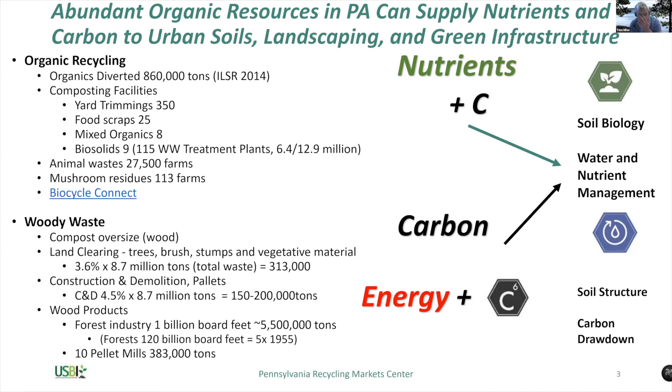So the total combination of organic recycling and wood waste together can be used to provide improved soil biology, water and nutrient management, soil structure, and carbon drawdown. Also, the woody waste can be converted to both energy and carbon in the form of biochar.

Composting generally involves a significant amount of nitrogen. If biochar is added to composting, it will capture that nitrogen and make it available to the plants. The same is true of phosphorus.

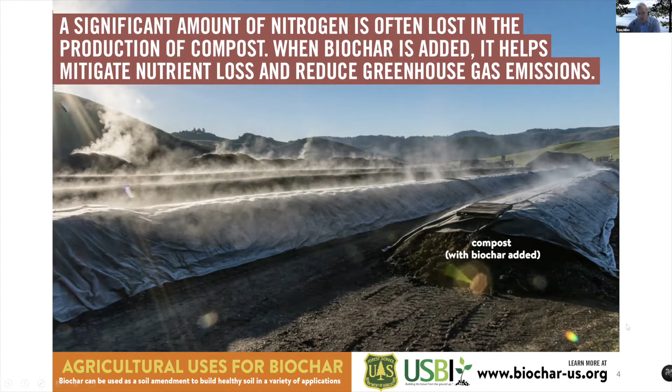So in Pennsylvania, for example, as in many other states, there are some good resources already for biochar. One of the earliest companies was Soil Reef, a company called Rhizochar, which is an inoculated char, and Organic Mechanics. Mark will speak today. Green Light Plants, Dale Henderson has a lot of experience with biochar, as does Gary Gilmore, who's just recently retired from the Forest Service, and Chuck Hegberg, who will also speak today.

On the policy side, the Department of Conservation and Natural Resources, as I think Chuck will show, has some experience with biochar. EPA Region 2 and 3 has been supportive of biochar and water quality. You've got some great research organizations and laboratories, and even Rodale Institute and Longwood Gardens also have experience with biochar. And you've got two great technology providers for industrial scale biochar production in the form of Heyl & Patterson and Ecoremedy in Pittsburgh.

So carbon in biochar is delivered in solid and liquid forms, providing structure and function in soil. This slide is to remind us that what inspired this was terra preta. In the upper left-hand picture, you can see us in Brazil about 10 years ago looking at the terra preta soils.

And just a reminder that the biochar, even though it's charcoal, will wind up in a soil solution. So you have a combination, as was with the terra preta, of nutrients—in their case from kitchen waste and biosolids—mixing with charcoal together in the clay and making a soil solution.

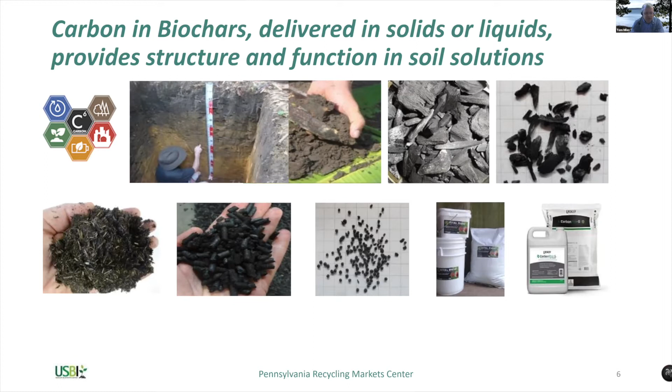So biochar is available in chip form, as you see there, also in a finer, quarter-inch grind, kind of a sawdusty form. It can be combined with fiber, densified, granulated, or even available in liquid form.

It's really the physical, chemical, and biological properties of biochar that make them versatile. When wood or biomass is heated, a skeleton of carbon is left as fine-grained, highly porous charcoal that helps soils retain nutrients and water.

Carbonized wood can be highly porous, with pore sizes and surface areas suitable for capturing gases and nutrients essential to plant growth. The porosity improves water infiltration and retention, helping soils make more water available to plants, which extends the growing season.

This is what makes biochars like batteries, which store energy and nutrients for the microbiome to cycle nutrients, carbon, and energy through the plants and soil. Ash and carbon components in biochars vary, which enables them to improve growth.

These properties also enable biochar to capture pollutants in stormwater. Their large specific surface area, porous structure, and content of non-carbonized organic fractions provide high variability in surface functional groups, which enable sorption of pollutants and nutrients.

Biochar products are suited to urban uses like garden landscape, turf, horticulture, and community gardens. New products and management techniques include biochars, biochars with compost, biochar-based compound fertilizers, biotic soil amendments where biochars are combined with organics, minerals, and biologicals, granulated and liquid products for seeding, and even micro and nanocarbons.

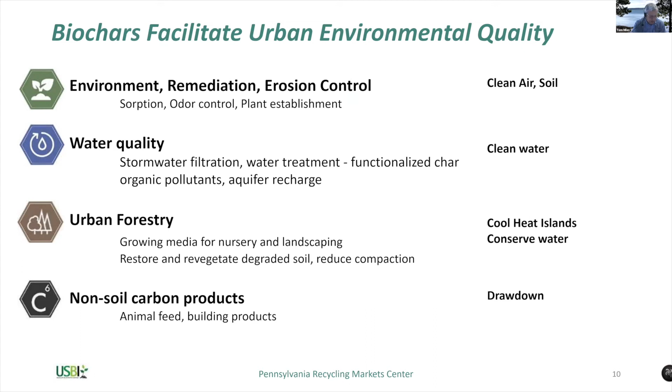Innovative uses of biochar in urban forestry include improving tree survival at establishment, soil decompaction, growing media, and revegetation. Non-soil carbon products and markets are emerging, such as feed and building products. Arborists use biochars in their growing media to establish or repair urban trees.

Biochars are used in structured soils, rain gardens, and bioswales to improve growing conditions and reduce pollutants. The city of Stockholm, as Chuck will describe, uses biochar and rock in structured soils to reduce tree loss from compaction. Excess heat from carbonization is used to heat buildings. This practice has been duplicated in other Scandinavian cities.

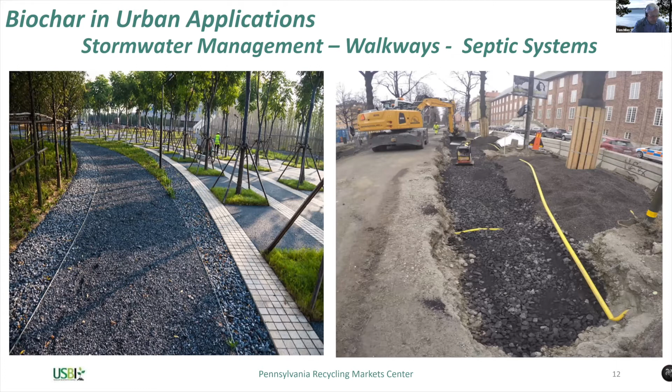These biochars are also used in green roofs and other green infrastructure. Biochars are added to fiber, seed, and fertilizer to improve plant establishment and hydroseeding. They're increasingly used in bioswales and rain gardens to prevent metals such as copper, zinc, and cadmium from entering waterways.

The city of Minneapolis uses biochar to filter E. coli in stormwater. Biochars are used to reduce chemical oxygen demand. The benefits and appropriate use of biochars in these applications has been demonstrated thoroughly in science and practice.

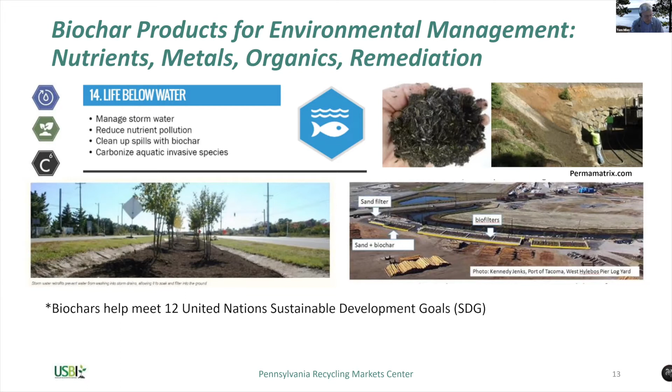Biochars are effective tools, but more landscape architects and engineers in public agencies must write specifications and approve biochar-based products for demand to grow. New uses in building materials such as wallboard and cement increase the potential to sequester carbon with biochar.

Biochars in wallboard provide additional cooling and reduce electromagnetic transmission from house wiring. Biochars improve cement properties and reduce the weight of masonry and building materials. These products are still in testing and development.

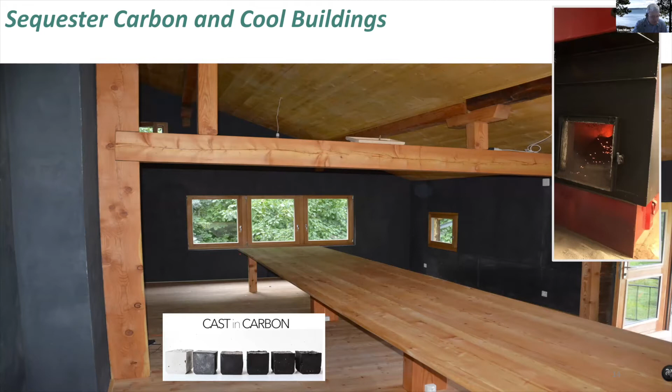Biochar improves properties of plastic composites for landscape, building, and decorative uses. At least one company is nearing commercial production.

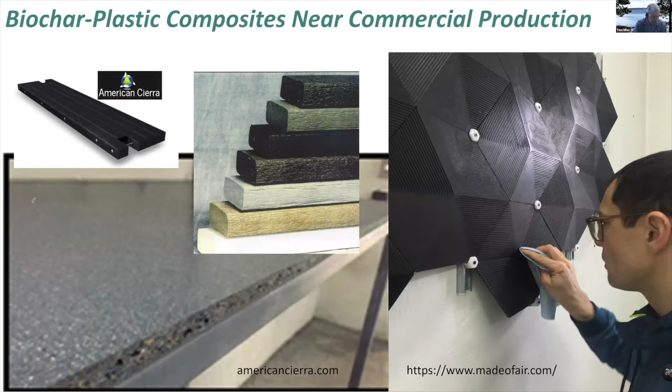New biochar products have been developed for improving the resilience of asphalt, for stabilizing road beds, in building blocks, and to reduce the weight in masonry.

Mobile and stationary systems are used to produce biochars. Systems with capacities up to 2 tons per hour are usually mobile or modular. Production rates of 2 to 6 tons per hour are typically done with existing pyrolysis or gasification technology.

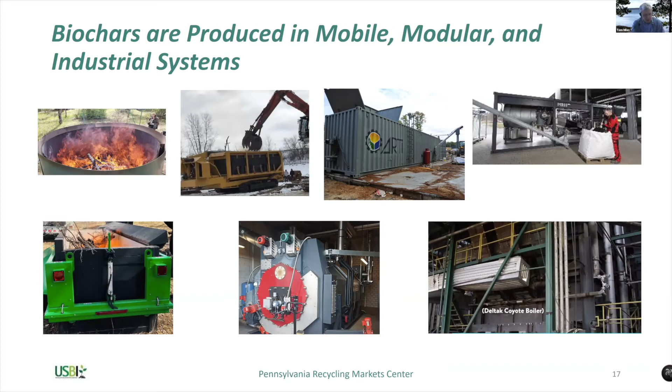Biochar is made by heating wood in the absence of air. In this simple kiln, a high-quality biochar can be made by limiting air at the base of the fire. Wood is heated as it sits in a pool of pyrolysis gas. As the wood is heated, gases evolve, which mix with air above the rim and burn above the kiln.

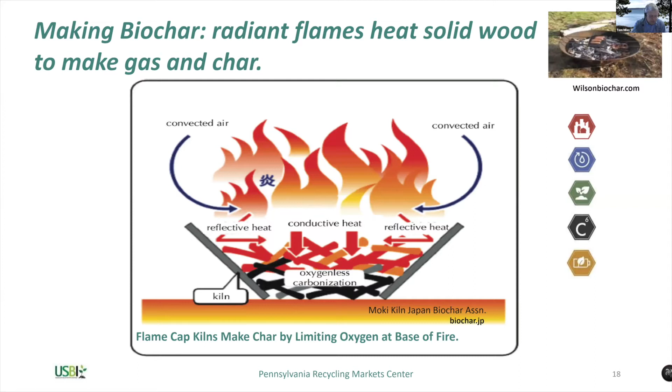Radiant heat from the flames heats the wood and converts it to oils, gas, and char. Biochar can be made in small engineered kilns or controlled piles, which are usually less than 1 cubic yard.

Mobile carbonizers can process urban wood from land clearing, prunings, and old pallets at capacities of up to 200 dry tons per day, producing about 3 to 4 tons of biochar. There are about 30 of these systems in operation. They're mostly used for residues with tipping fees such as urban land clearing and orchard removal. These chars can be used directly or modified for value-added products.

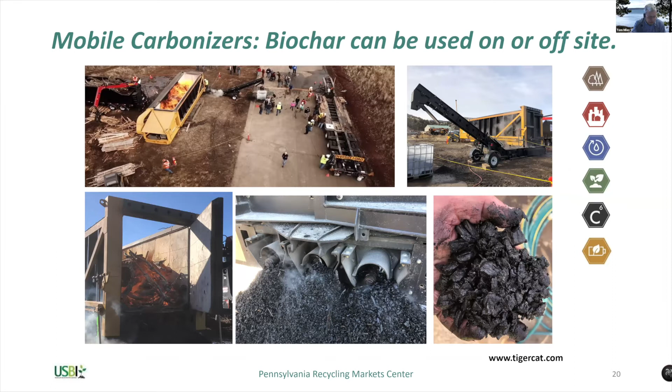The U.S. Forest Service has been developing a small mobile carbonizer in cooperation with Air Burners, Inc. The mobile air curtain burner has been in use since the 1990s as a clean alternative to burning slash piles. The burner under development removes biochar as it is formed. The machine is intended to have higher carbon recovery than existing mobile carbonizers.

The U.S. Biochar Initiative will assist field testing the prototype in 2020. Scale up to larger capacities will be determined by the commercial partner.

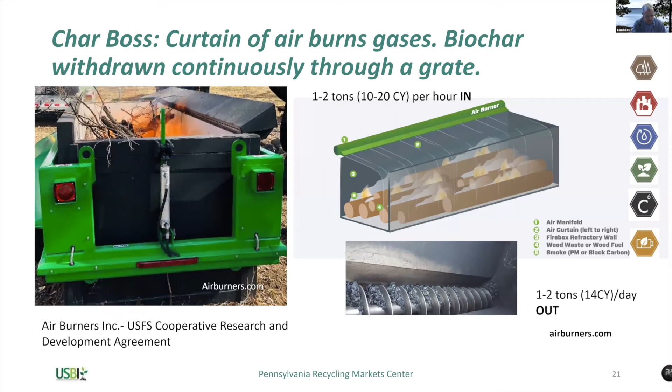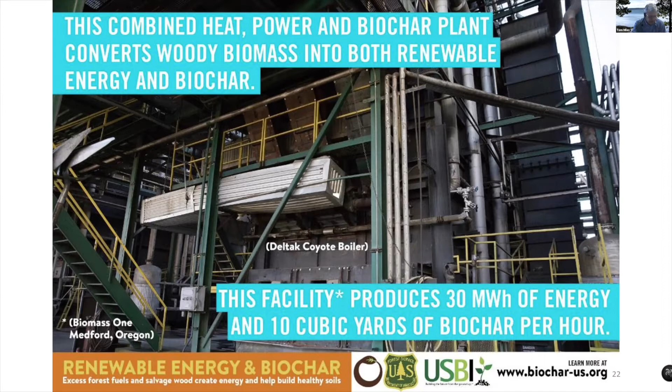Some existing biomass energy facilities recover fly ash with high carbon content. While most plants are designed to re-inject and re-burn fly ash, some plants can recover it for use as biochar. This 30 megawatt plant consumes about 240,000 tons of wood waste per year and can produce about 10 cubic yards of biochar per hour, or about 72,000 cubic yards, equal to 9,000 dry tons per year. The chars are often post-processed to remove fines depending on the market.

Small-scale gasifiers and boilers can generate heat and biochar. The units shown consume 500 to 600 pounds of fuel to produce 2 to 4 million BTUs of heat and 100 to 150 pounds, or half a cubic yard, of biochar per hour. They'll produce about 500 tons, or 4,000 cubic yards, of biochar in a year.

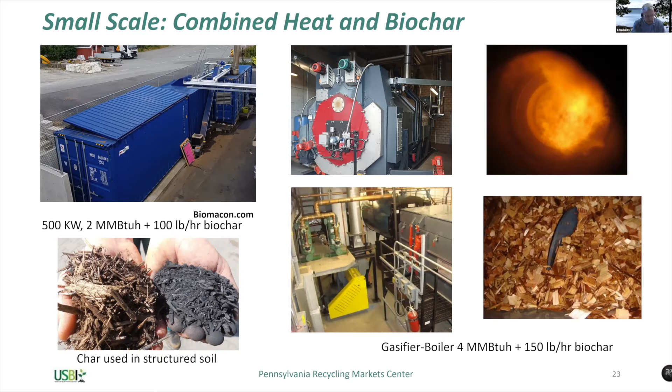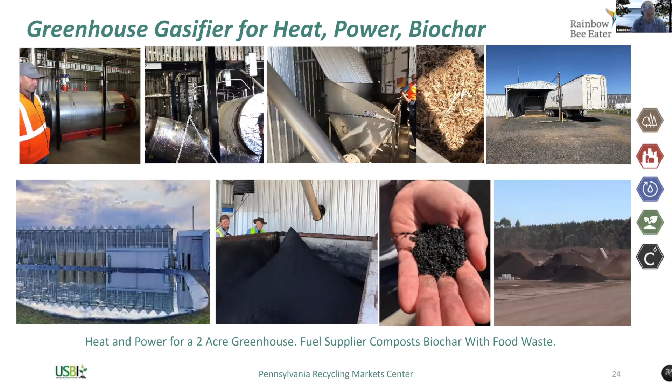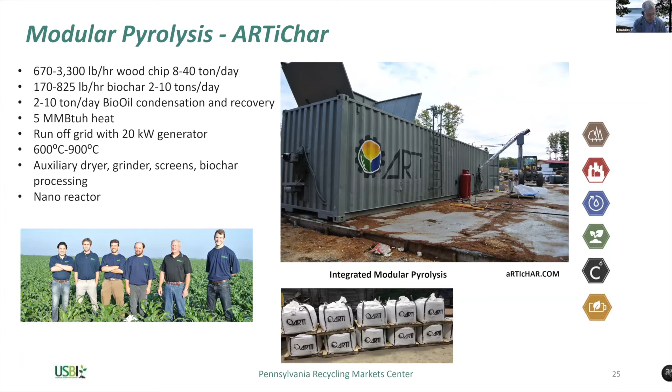This modular system can process 1.5 tons per hour to produce up to 10 tons of biochar per day, or 24,000 cubic yards, or about 3,000 tons per year. Stationary pyrolysis provides additional process control for value-added products.

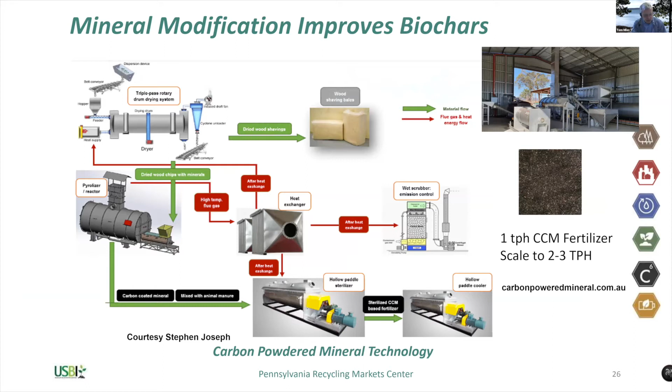And finally, mineral-modified biochars mimic the man-made, or anthropogenic, soils in the Amazon, like the terra preta we saw earlier. Minerals like magnetite or expanding clays like bentonite are added to wood during carbonization. The intermediate biochar is then baked with additional minerals in a secondary process. The results are mineral-modified biochars, which have several times the value of biochar and can be used both in soil amendment applications and also in stormwater applications.

So in summary, Pennsylvania, for example, has abundant organic resources to make biochars for use in urban soils and green infrastructure. There's knowledge and support for biochar in industry, academia, and government. Locally, biochars can be made in small, medium, and large industrial quantities, and raw and engineered biochars are suited to improve soil and water quality for use in soil amendments and in green infrastructure. And thank you very much.

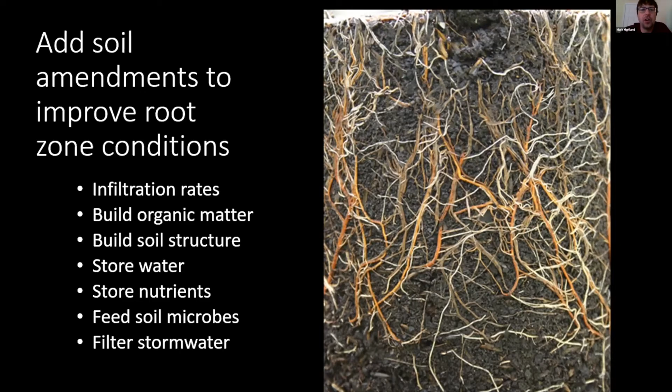So we were going to add soil amendments because they improve root zone conditions. Most of the time we are talking urban poor soils for construction projects, et cetera. And so we want to do all these things when we add soil amendments, right? You're trying to build soil structure, build organic matter when it's lacking, improve conditions. It's going to store more water, more nutrients, feed the microbes, and filter stormwater - all functions of soil. But we want to enhance the soil to build soil structure so that the soil can perform better for us in our landscapes. Can biochar solve all landscape problems? No, of course not.

No, it's not a silver bullet, but certainly it is a tool in the tool chest to use. And any time you're looking at a project, I always encourage a soils management plan so that you only till once after you know exactly what you need, or air spade. Definitely post-installation, you need a nutrient management plan. You need to monitor things to make sure they aren't going sideways at the site, because as long as you do your due diligence up front, it's not going to be the biochar causing problems. It's going to be one of these other things.

Of course, biochar is very helpful in soil. It can do a lot of benefits, so some of these issues can be mitigated through the use of biochar. And Tom gave us a great overview, some pros and cons of biochar in relation to using it in urban soils or for an engineered soil.

It's going to increase your water and nutrient holding capacity as well as that biological content. It is somewhat permanent, as Tom alluded to—the terra preta soils, that carbon is still in the soil. There is some labile matter, and stuff that's going to be around a long time when we add biochar. So there's a good portion of it that's relatively permanent, certainly in terms of a human lifetime. It's shown to be great at increasing permeability, breaking up compacted soil. Of course, you're sequestering CO2. It does add buffering capacity, although pH can be alkaline.

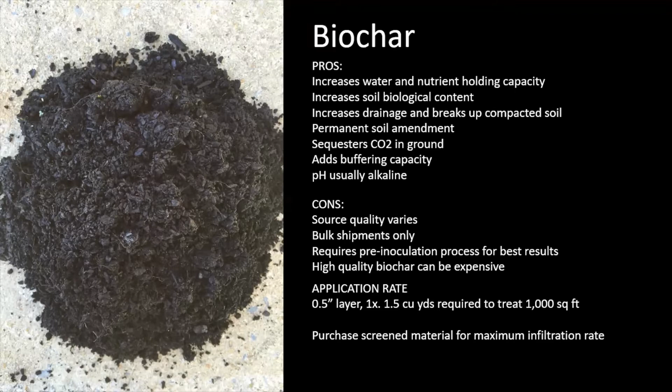In sourcing biochar, the source material can be important—wood versus manure. I'm sure Chuck will touch on this as well, but wood-based biochars are generally proven for stormwater management. Manure-based biochars are going to have a bit more fertilizer in them, so we don't want to use that in a stormwater situation where you're trying to keep fertilizer out of the water, so wood-based biochars can be better for that. Some ideal properties: ideally pH between 7 and 8. You don't really want a pH of 10 or 11 with your biochar, because that means the ash wasn't removed, so a high pH can affect things. You just need to know what it is.

Carbon content needs to be above 60%, according to the Association of American Plant Food Control Officials, in order to call it biochar. I know there's some internal work and debate on that number, but right now that is the rule. So it needs to be above 60, and I'd like to see it closer to 80, because again, the carbon content is directly related to the biochar. Ash content is going to be nutrients—there's nothing wrong with nutrients, plants need nutrients, but you just need to know what you're getting.

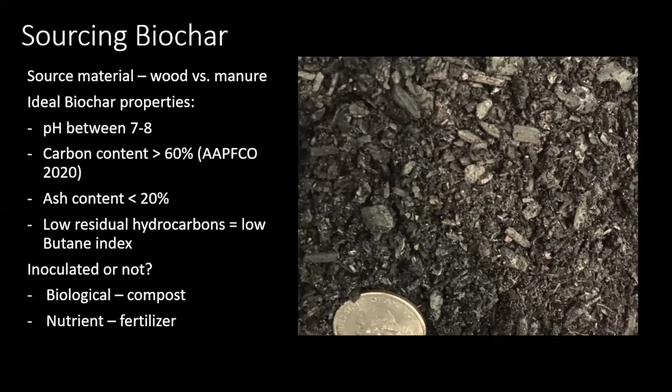Low residual hydrocarbons so there's less for the microbes to break down before plants start growing in it. And again, inoculated or not—biological inoculations versus just fertilizer inoculations. Tom mentioned there's a lot of different products being made with biochar, but it needs to be inoculated to go into soil. As Tom alluded to, it's kind of like a battery—if you don't charge it up with something, it's going to steal nutrients from the soil, and that's going to be a fail. So it does need to be inoculated.

And there's lots of different ways to do that. Some of the most common are mixing with compost, mixing with fertilizers. So you do need to inoculate, right? Microbial inoculation is great—this will happen naturally in the soil if you have time. There's also research showing that if you mix biochar directly into soil, the same soil solution will form over time—the complexing that goes on between the biochar, the microbes, and the soil particles, especially in a stormwater project where you're putting in raw, non-inoculated biochar, it will complex over time as well. Research shows that.

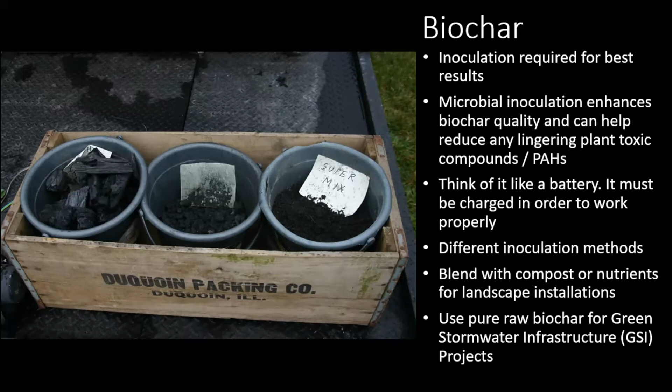Speaking of research, it's all about reducing leaching, holding nutrients in the soil. That's one of biochar's big secret weapons. They're still researching optimum field application rates for large-scale farming trials, but there is evidence that it increases infiltration rates up to 57%.

Most research shows the effective rate is right around 5%. In some cases, in some plant types, it might be a little less. It can go all the way up to 10%, again, depending on project, situation, plant type, soil type, all those variables.

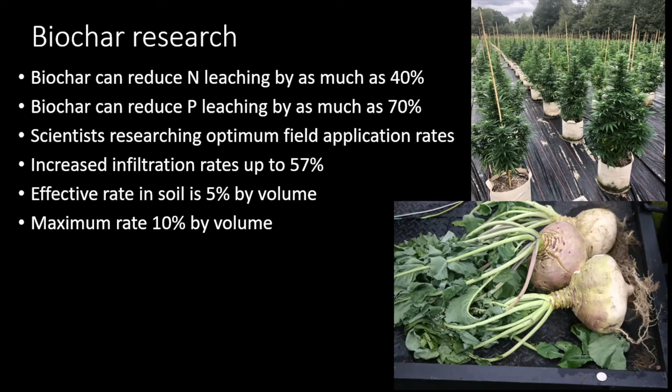The images you're looking at are of plants grown with or without a biochar enhanced product. That's biochar enhanced with minerals and biology. It's one of the products we have at Organic Mechanics.

This shows the density and how the roots grow into it, and it holds together like a little candy bar when you pull out the plants at the end of the season. There's a lot of research out there, so much that if you're not finding it, the book Biochar for Environmental Management, Science, Technology, and Implementation is a great place to start.

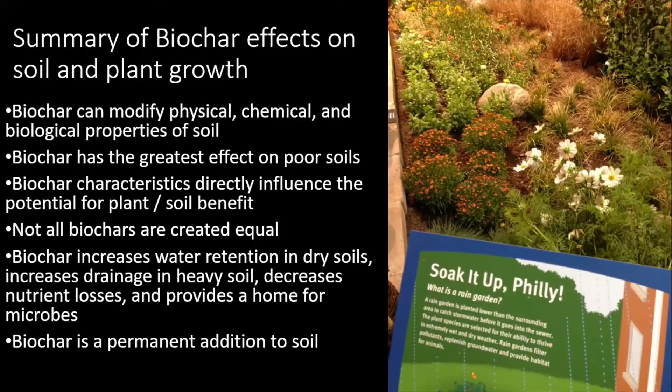It increases drainage. It is a permanent addition to soil. So we offer it in these engineered mixes. We also offer it in the consumer size bag, which has been doing somewhat well.

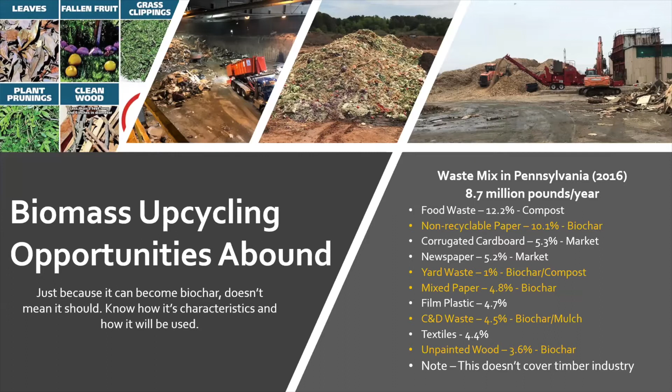Now as far as some of the challenges, we've got climate change happening more. As far as the hydrologic cycle, the nutrient cycle, the carbon cycle, we have to recognize how biochar, or carbon, is a critical element in having any of those cycles work, function, and balance. The hydrologic cycle through soil modification, the nutrient cycle through microbes translocating, absorbing, or modifying nitrogen and phosphorus, and even some of the metals. The carbon cycle has a play in all that, and we need to try to get more carbon back into our soils.

So green infrastructure is not new. It's been around for a while in different forms. The ancient Roman Empire was doing it with rainwater harvesting and flood mitigation, underground storage, flood mitigation, and wastewater removal through the post-Roman era to the 1800s. And then now, in the 20th century to present, there are all sorts of different forms of what we would define as green infrastructure - best management practices, low impact development. Sponge cities in China are a big deal.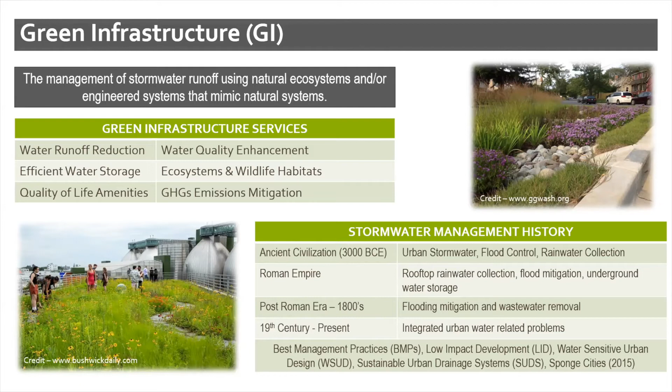So really it's just a matter of managing stormwater runoff using natural ecosystems, or engineered systems that mimic natural systems. And that's probably one of the harder areas to work in - trying to mimic nature using natural products.

So one of the problems with typical bioretention media or engineered media is that if you work with it, a lot of times it's made up of a tremendous amount of sand for filtering, but it really doesn't provide a lot of benefits as it relates to water quality. I mean, you might be able to suspend solids or bacteria, some phosphorus removal, but for the most part nitrogen removal doesn't occur, and it is prone to clogging.

A lot of times you don't think about sand that way, but as it begins to settle down, just like beach sand, even construction sand will eventually start to plug and compact down. And so your infiltration rates will begin to reduce.

But also one of the aspects with engineered media is the poor vegetative support. Because it's designed to drain quickly and infiltrate, it doesn't retain water for vegetation, which plays a role in nutrient uptake and removal, habitat, and soil aggregation—building those components of soils with the microbes.

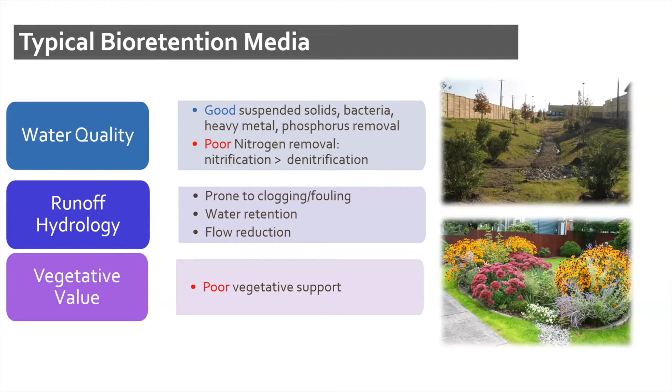So what was happening was a lot of failures, particularly in the Mid-Atlantic. Many miles of bioretention swales along highways were not working because they were predominantly sand. And so there's been a lot of work in modifying that.

So some of the benefits of biochar in stormwater management, as Tom and Mark pointed out already, is a large pore volume. It has increased water retention, very good capture of the first flush of runoff. And then through KSAT modifications, you can improve the infiltration of even the higher flows, depending on the soil you're working with. High CEC and surface area adsorb nitrogen compounds and reduce effluent concentrations. I'll touch on a few of these in the presentation.

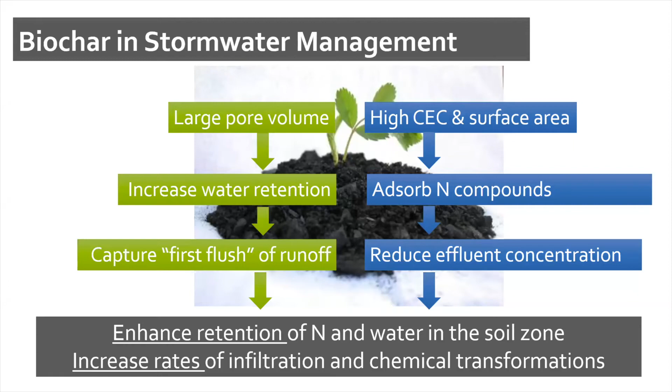Not to get into a whole bunch of research, as this has been going on since 2010 at the University of Delaware—many different types of studies, most of it funded by the transportation industry. With bioretention media, enhanced media, what we've found is that we're able to retain 11 to 27% more stormwater, predominantly in the pore spaces of the biochar, and it's plant available, which is critical. In that pore space, we're getting a higher redox, so conversion potential within the biochar.

And even though you're holding more water, infiltration capacities did actually increase. I might touch on this a little bit as I get deeper into the presentation on why that is.

Also, as I pointed out, we're seeing less clogging. A lot of that has to do with the fact that biochar is an irregular material, just due to the shredding of the material—it's not a rounded material like sand or gravel. So when it goes in, you can think of it like an aggregate going into the soil, making it more difficult for soils to compact, but also allowing for more micro pore spaces to form within the soil structure.

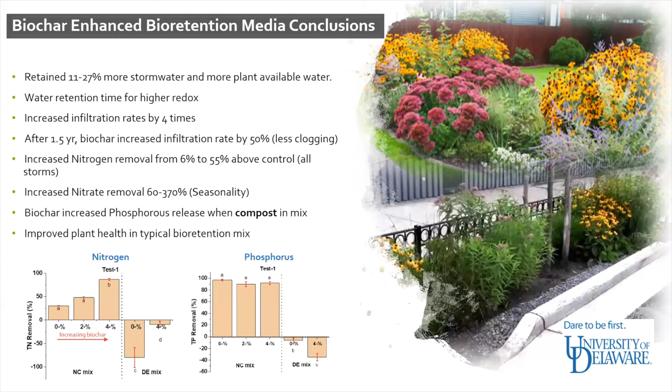So here's a project, one of the early ones. Sadly, I still don't have photos of it with plants in it. But this was done back in 2014, one of the first projects done by the Inland Bays, which was a nonprofit. They tried a variety of different mixes in the bioretention mix, anywhere from 5% up to as high as 15% by volume into the bed mix. And in all cases, they're all still working well.

The sad part is, and it's something that's difficult with grants and with clients in general, is the funding's not normally there for monitoring. So it's very difficult when these projects get put in to actually get any post data on them. And that's something I think as an industry we need to get better at.

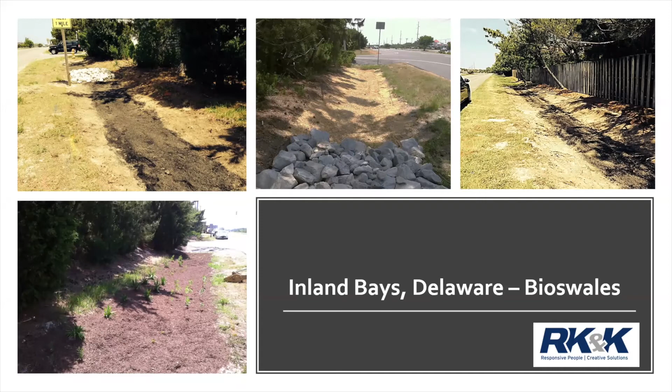This one was a project down in DC. It was actually a regenerative stormwater conveyance system. I don't know how many folks are familiar with that technique outside of culverts. If you've ever looked at a number of culverts, they generally have significant erosion, and the ability to capture and reduce sediments, but also capture the nutrients, is being designed through these regenerative stormwater systems. In this case, back in 2013, biochar was added to the mix to capture the nutrients and predominantly metals.

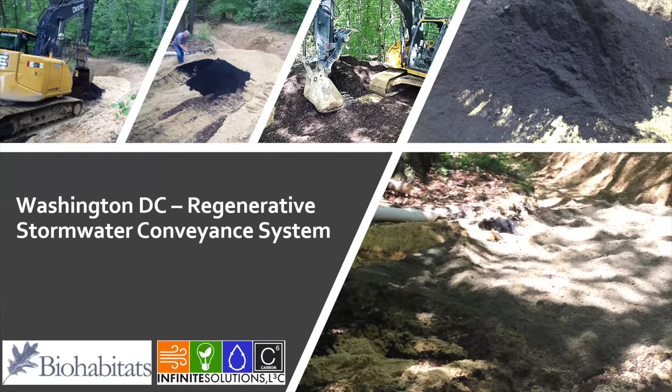Tom had mentioned the concept of structural soils. Now, structural soil was actually developed by Cornell University, and they were using peat and a variety of other mixes. But in this case, Stockholm just basically used rock and biochar, a little bit of compost, not a lot, but primarily at the top end of the soil matrix. Really, it just stores a lot of water, and the biochar helps process the nutrients. This is a very good technique to use in urban centers, particularly in those right-of-ways from the curb to the backside of sidewalks.

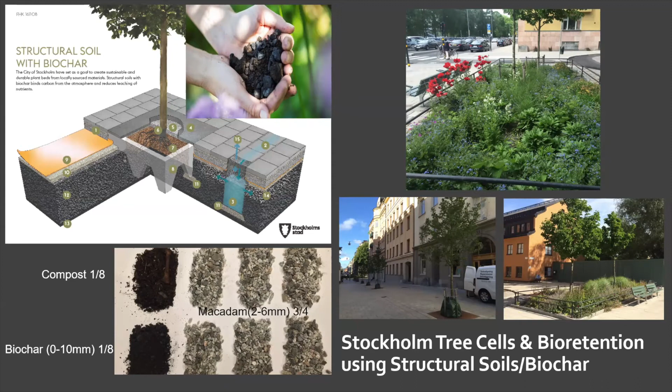Anytime some downtown revitalization is happening, it's a good space to build it under the ground and put the pavement right on top, some pervious pavement, and increase the storage. This has been extremely successful. Hard to believe that a big box of rocks can actually perform this well, but with the biochar, it's been extremely successful. I'm hoping to try some of this on a few projects here in the Mid-Atlantic.

The other benefit is that you can increase the depth of your media, which will allow you to change your plant types. So rather than going with succulents, in most cases in a shallow green roof product, you can go much deeper and get pollinators, perennials, native grasses, and even shrubbery on the roof with the benefit of the biochar, without adding a tremendous amount of additional weight. So this is actually a pretty exciting space in our urban environments, and one I hope to see more of in the future.

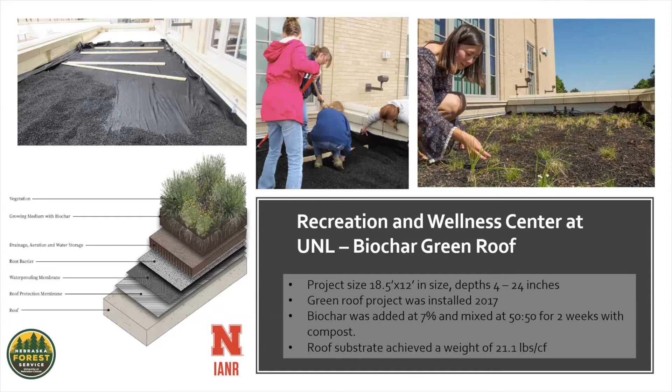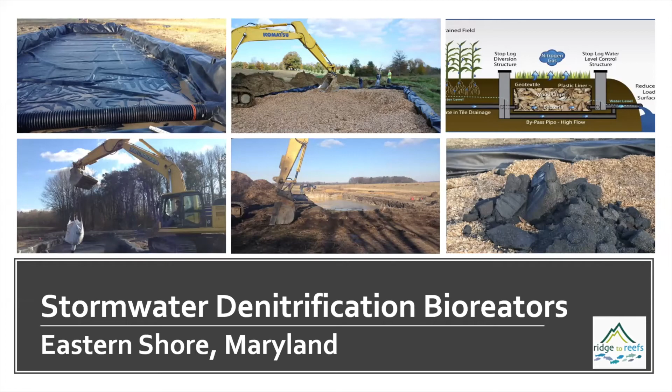This here is basically a denitrification bioreactor. It's commonly used in agricultural areas, but is now actually being looked at also for ditch modification, that area where a lot of times people ignore the ditches along highways and so on. But those are the ones that capture the first flush of all of our pollutants, whether it's heavy metals or hydrocarbons or even the nutrients. So retrofitting the ditches has tremendous potential, and a combination mix of wood chips and biochar is a good way to start. You can also add other types of amendments to the mix if you want to remove phosphorus or other components, which I can't really get into on that front, but it's a very flexible system, and one that I believe is getting looked at more and more in the process of doing the retrofits.

One of the larger biochar projects was actually a stream restoration project, and in this case, it was amending the floodplain with biochar. They had a very thin layer of topsoil, and in order to get vegetation growing, they applied the biochar to the floodplain. Besides the nutrients, there were some heavy metal contaminant issues, so it was added as part of the floodplain and overflow treatment areas in this stream restoration. And so actually there are more projects coming out with biochar in it for banks, and even in the bed itself for increased denitrification in the hyporheic zone of some of the stream channels.

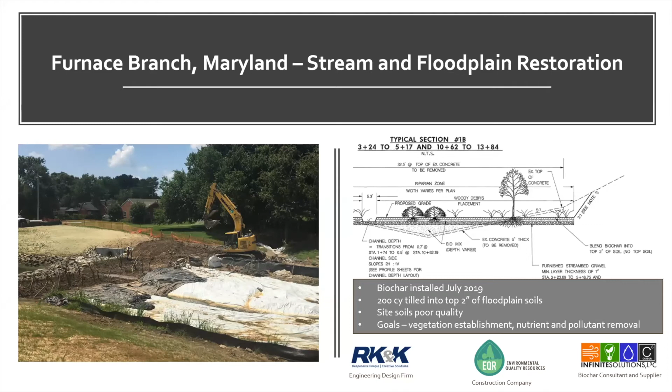You can also just use hydromulching or tack. There's commercial products available, and it helps the seed germinate faster and provide nutrients with the seed mix along with the carbon. So you can reduce the amount of watering needed to get your turf established and your slope stabilized. So it's something that could be considered.

Now, an area on urban soils that's kind of where I've been focusing in, probably since 2012, with some of the research.

A lot of it is turf modifications, in our case turf to meadow conversions or wildflower conversions. But in urban areas, as much as we'd like to think it's great for us as practitioners, homeowners generally push back on giving up their turf, putting in rain gardens and things like that in their yards. Some of them have small yards, so they can't give up a lot of space from their perspective.

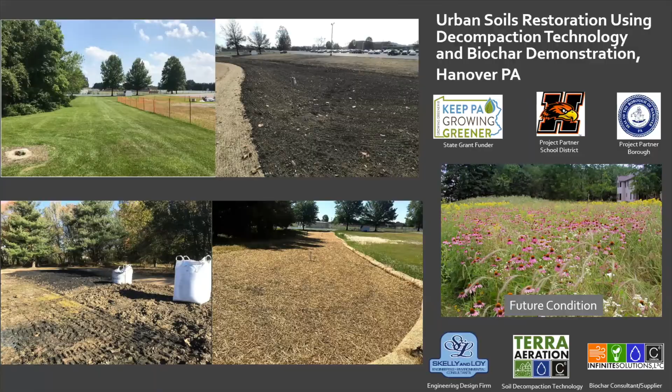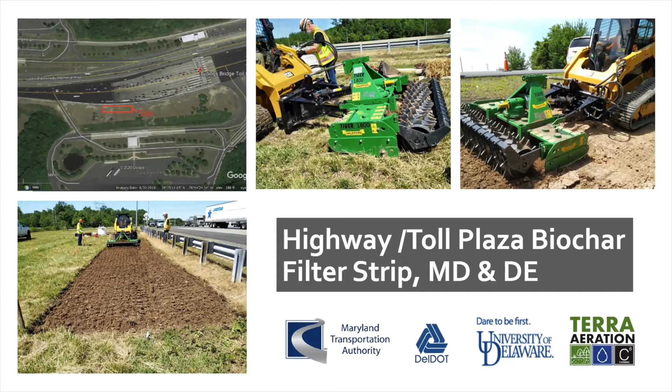DelDOT is continuing to improve and expand on some of these projects, as well as in some of their infiltration basins. So what I wanted to do real quickly is touch base on some of that research and what's happening. This was the first project done for DelDOT under a grant with the Chesapeake Bay program.

As you can see in this study, this is just a compacted soil that we have on the highway side, which, as most of you who've worked on highways know, is pretty dense and a mix of all kinds of stuff. In this particular study, we were focusing primarily on the top 12 inches of amendment.

The irregular biochar particles act as sort of an aggregate, and then you have the micropores and macropores, where we have the water holding capacity and the biology, which helps soil aggregation. This is what our soil looked like. After we modified the soil, you can start seeing the aggregates more, and a bit more bonding of the material. So for this study, we focused very heavily on this top portion of it.

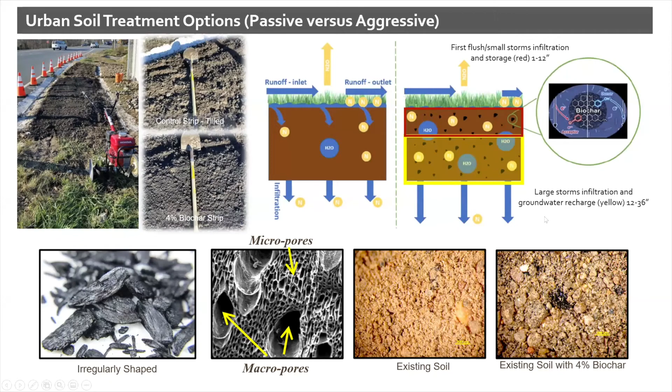The next area we're working on is to try to get more of the deeper infiltration capacity within the soils. This is the only science side I'll show, but based on that small study, you can see that just tilling the soil, you were able to get about a 20% reduction in runoff.

But by adding the biochar, we were able to get 53%. When you look at the exceedance probability curve of volume of runoff, for the most part we were capturing 100% of 85% of the storms coming through. You can see the runoff here, but right at this point we're out here before we even start getting any runoff from the storms.

And so we were getting approximately an 88% reduced runoff volume under this one study. Now we're basically monitoring some of the other areas being installed to see if that's pretty consistent.

But in general, we're getting 8-to-1 ratios of pervious to impervious on what we end up having to do on a footprint, which is huge when you're working along highways, because the shoulders are pretty limited on what you can do. And what's nice is that the DOTs already own that real estate, so they don't have to acquire more.

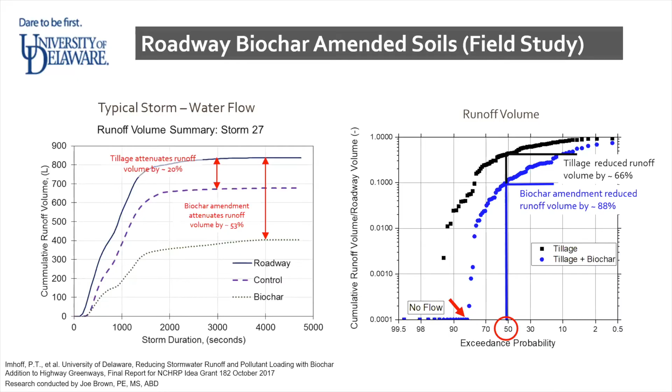So as far as the deeper side, we're now beginning to experiment with deep soil decompaction, basic pneumatic technology, injecting amendments into the soil, breaking up the compaction, and then treating the soil up on the surface area.

So we're basically filtering the water, and then on any gravity flow-through infiltration, it'll go down into these fractures at a deeper pace. Depending on utilities and other constraints like groundwater, we'll basically be looking at 3, 4, and 6 foot depths.

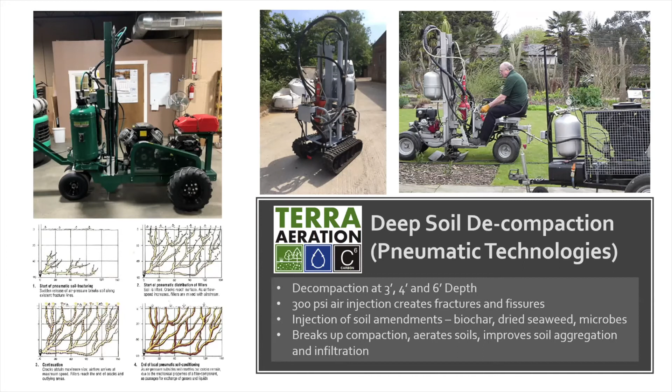In fact, we're getting ready, probably in early September, to trial this on an infiltration basin that DelDOT has that is currently failing. We're going to fracture at both a 6 and 3 foot depth with a mixture of biochar and other amendments to see if it can improve the infiltration of that basin.

And so with that, that's all I have for now. So I'll turn it back over to the moderator.

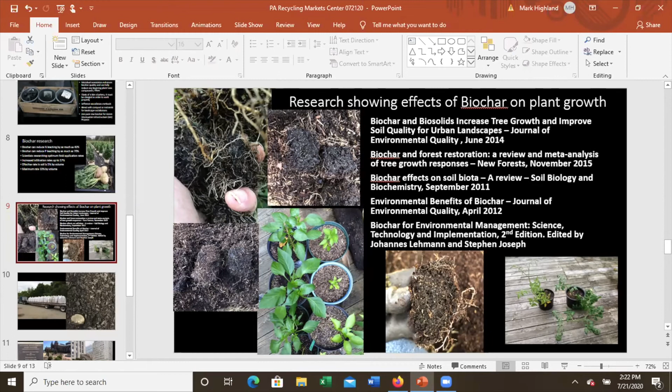So I'll let Chuck and Mark talk about the cost of purchasing material, but in terms of production, small scale production is pretty expensive. We have about 135 suppliers of biochar across the United States, and what we found is that we have a large number of small producers delivering pretty much locally to niche markets, and then a few large producers that produce large volumes. But depending on the quality, we've got a real need for biochar suppliers in the Northeast. A lot of the biochar comes from the West or the Southeast, so you get a mix of qualities. I think Chuck or Mark, if you guys want to talk about what's available and what cost might be.

Sure. Yeah, so we don't make biochar at our facility, we buy it in by the tractor trailer load. We had an intern try to make biochar a lot of different ways one summer, but the bottom line is you really need to scale up and buy one of the big units if you're going to be doing it. So we're buying tractor trailers at a time. It's true, there definitely is a place for a top quality biochar supplier in the Northeast. We buy from a couple different manufacturers.

The cost, for example, if you were to call Organic Mechanics and order between 1 or 20 pallets of biochar, 2 yards of biochar is going to run you right around $700 for a 2-yard super sack, so around $350 a yard, and that's wholesale what we would offer it as. The more you buy in bulk, the cheaper it becomes.

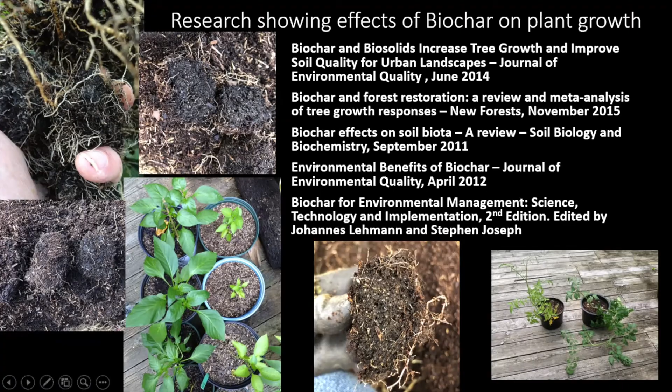All right, thanks, Chuck. And that's a little bit of a segue to the next question. So what do you think is the largest bottleneck for widespread use of biochar? Is it education of consumers? Is it, as you alluded to, regulatory hurdles, or is it more of a supply problem?

Yeah, all of the above. The chicken and the egg. I've been working in the Chesapeake Bay since 1987. And what I've learned from that process is within the environmental space, and stormwater, MS4 and all are part of the environmental space for water quality, is regulatory drives the market. There was a time no one did stream restoration, but when regulatory agencies started requesting stream restoration, then everybody started doing stream restoration, right? So the need to educate the regulatory agencies to the benefits of biochar is critical.

The willingness of the regulatory agencies to allow for innovation and to try new things, and not always have to follow the book, particularly here in the Chesapeake Bay and other regions, to say, well, how do I get credit for that? That's what the client's always saying, is how do I get credit for that? And so we need some more flexibility, and we need the assistance of the regulatory agencies to allow for this type of innovation to happen.

And then once there's a demand, there will be producers. There's too much CapEx that goes into this equipment without having some assurance that the regulatory environment is there and the product can be sold. No one's going to put their coin down to develop a plant unless there's opportunity. So the market will come in and help, but we need a little assistance by the regulatory community. Well, and demonstrations help. I think an example of that is Minnesota has had really good results with controlling E.